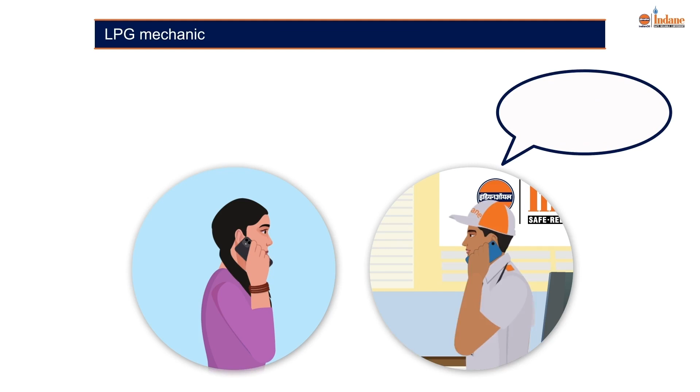A customer complaint highlights a problem with the product or service. These problems or complaints need to be investigated so that the services can be improved. Attempts should be made to resolve or address each complaint on time. It is the responsibility of every LPG mechanic to take feedback from the customer after the service.

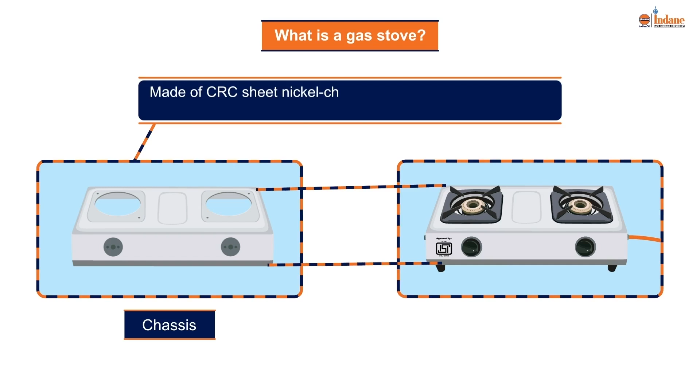To begin with, let's first understand a gas stove. A gas stove is an assembly of one or more burners forming a separate unit. It consists of a main chassis made of CRC sheet nickel chromium plated or painted, cast iron, vitreous enameled, or stainless steel sheets, etc.

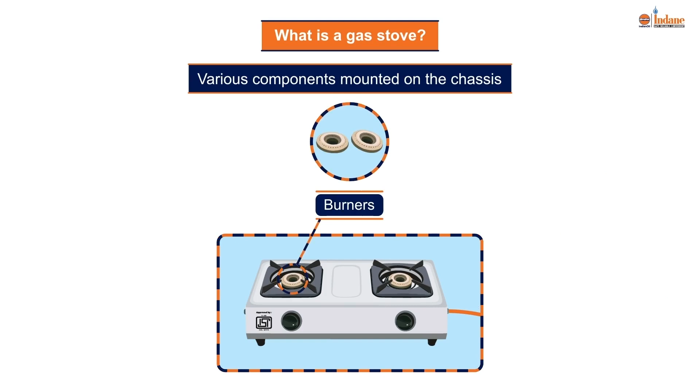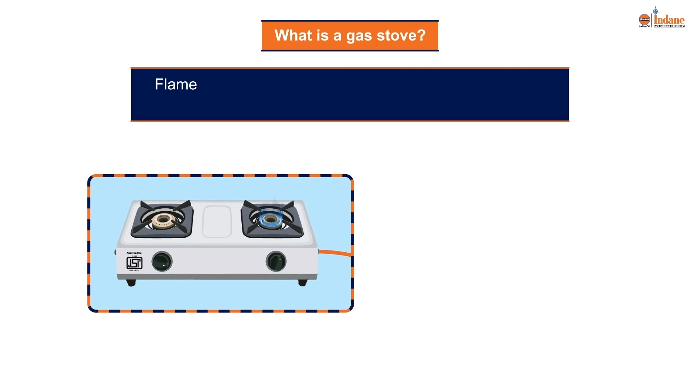Various components mounted on the chassis are burners, Suraksha hose, knobs, pan support, and legs. The flame or hot gases released from the gas burners can be regulated using the on or off knob installed on the gas stove.

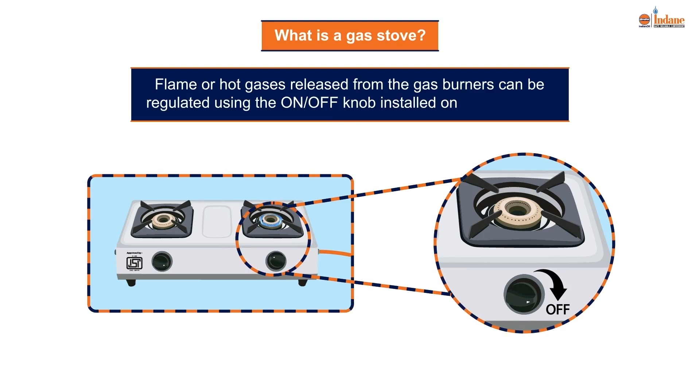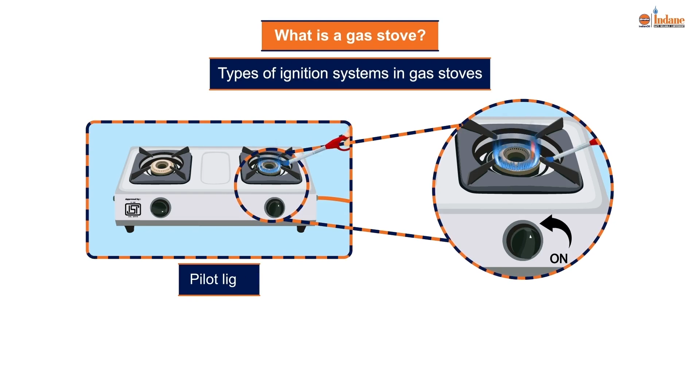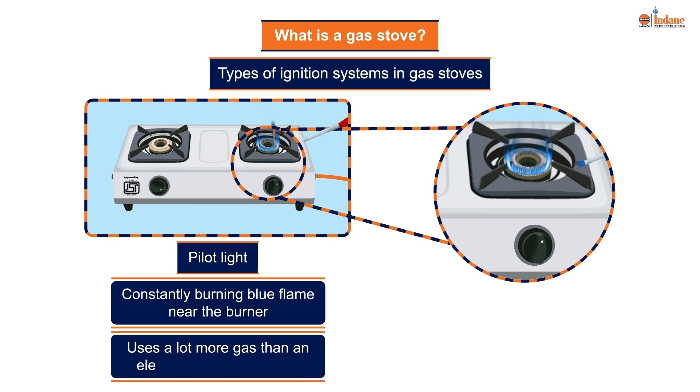Gas stoves contain one of two types of ignition systems: a pilot light and an electronic ignition system. A pilot light is a constantly burning blue flame near the burner. It uses a lot more gas than an electronic ignition system. An electronic ignition system creates a spark. You will hear this as a clicking noise only when you turn the burner on.

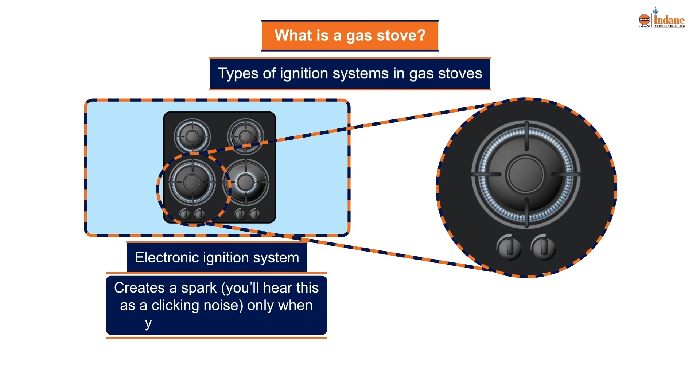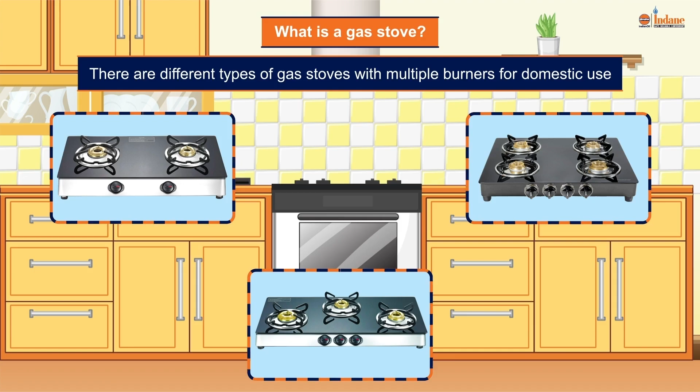There are different types of gas stoves with multiple burners for domestic use. With changing times, customers prefer modular kitchens with kitchen hobs in which the burners are fitted on the working platform of the kitchen, with operational knobs on top, side, or in front of the body. The principle of working remains the same.

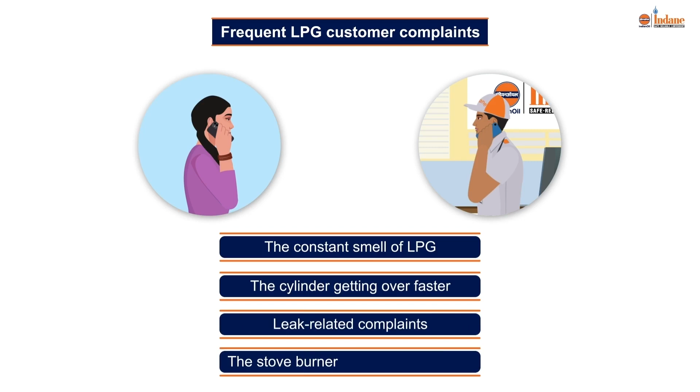Let's now look at some of the frequent complaints received from LPG customers and the ways in which the mechanic can respond to them: the constant smell of LPG, the cylinder getting over faster, leak-related complaints, and the stove burner not working properly. Let's now discuss the responses a mechanic should give for these complaints.

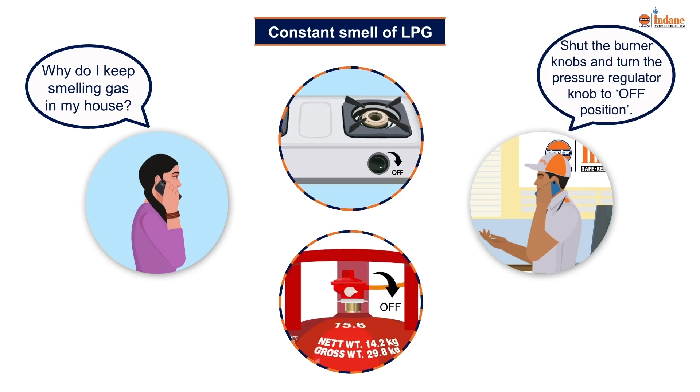When a mechanic receives a complaint about the constant smell of LPG, he should tell the customer to shut the burner knobs and turn the pressure regulator knob to off position. Open the door and windows for free ventilation. Extinguish all flames. Do not switch on or off any electrical equipment to avoid any electric spark or other sources of fire or ignition.

Light the burners only after the smell subsides completely. Check for the source of any possible leakage in the stove, regulator, burner, etc.

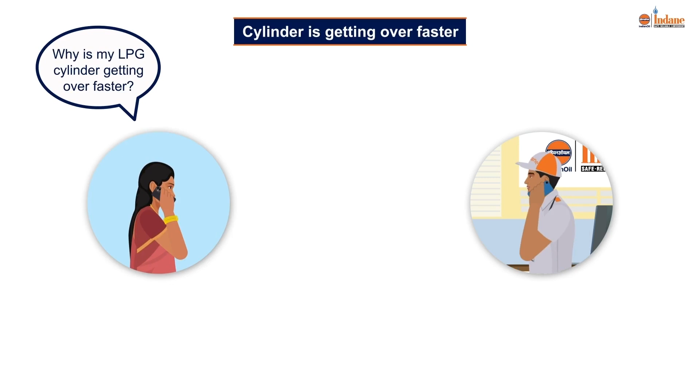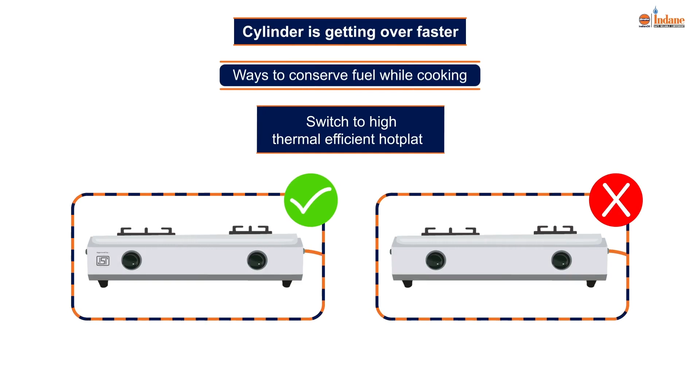If a complaint of cylinder getting over faster is received, understand that this depends on customer usage. Check the customer's monthly usage and consumption habits. Suggest ways for conservation of LPG. Educate them about conservation methods.

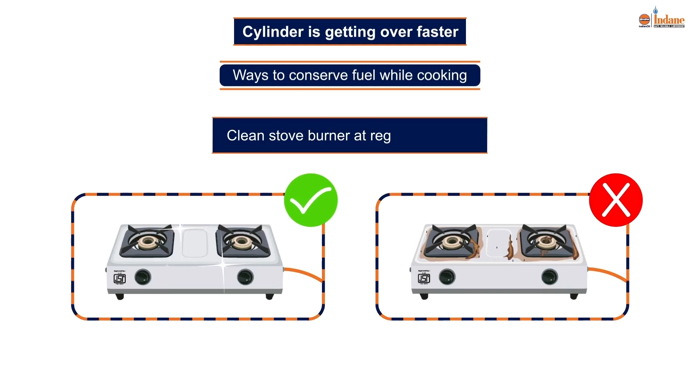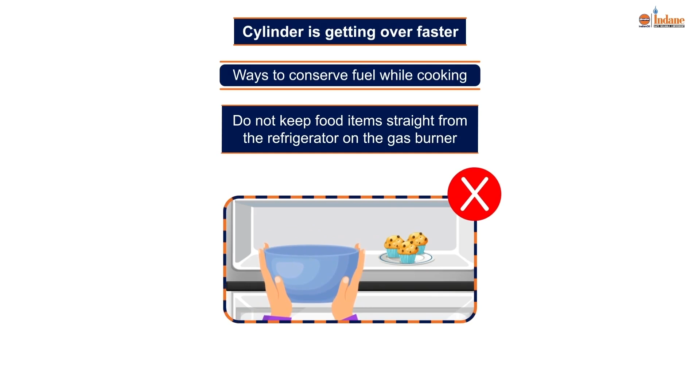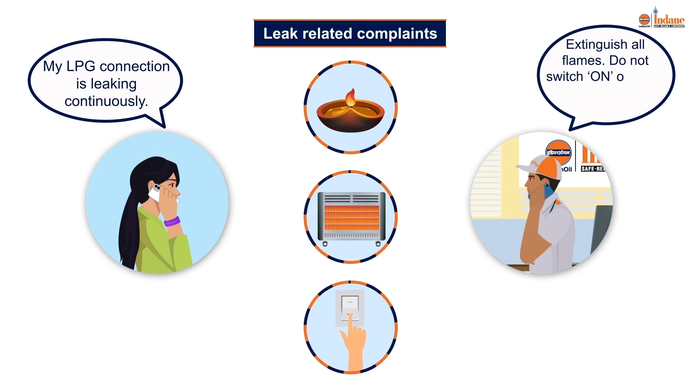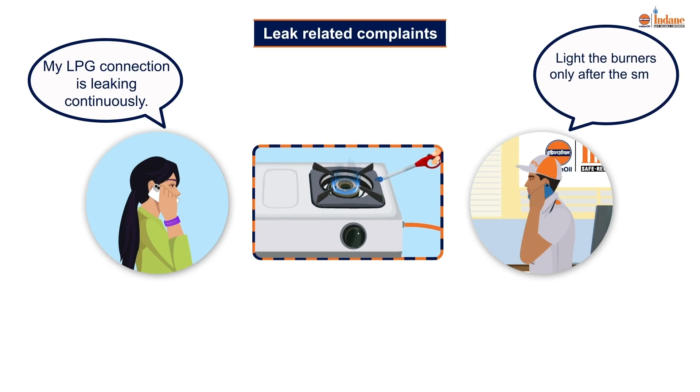If leak-related complaints are received, tell the customer to shut the burner knobs and turn the pressure regulator knob to off position. Open the door and windows for free ventilation. Extinguish all flames. Do not switch on or off any electrical equipment to avoid any electric spark or other sources of fire or ignition. Light the burners only after the smell subsides completely.

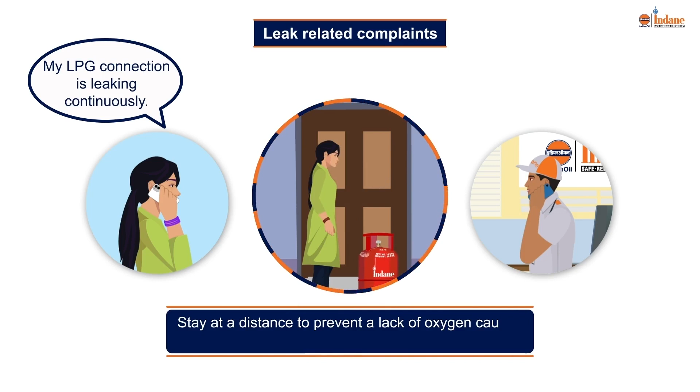In case of persistent or heavy leakage, detach the pressure regulator from the cylinder valve, fit the safety cap on the valve outlet, and remove the cylinder without tilting it to a balcony or open space. Stay at a distance to prevent a lack of oxygen caused by breathing air with a high concentration of gas.

When a stove burner not working complaint is received, tell the customer to check if the burners are switched off and allow the stove to cool down completely before cleaning. Check for any possible damages to the stove burner and replace if necessary. Clean the burner using a toothpick and light the burner to check the flame.

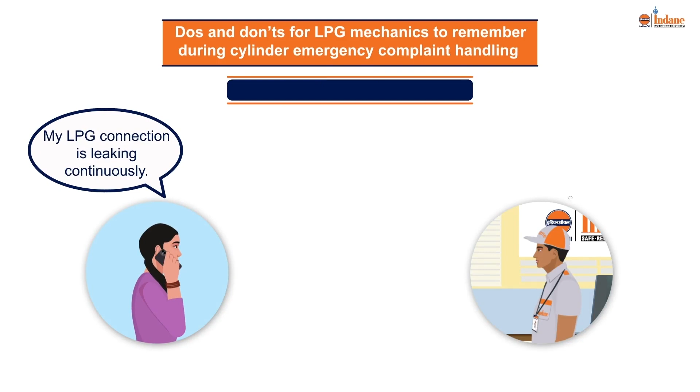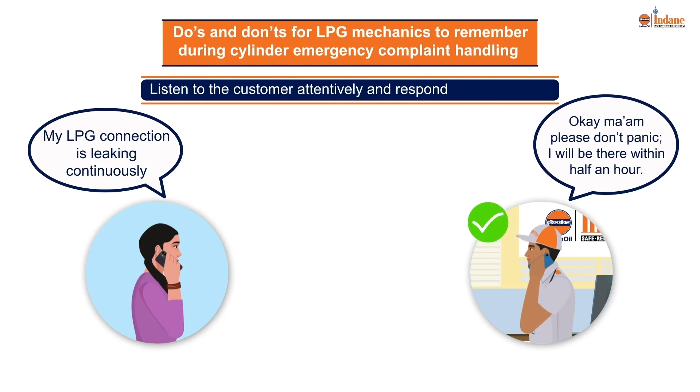Here are a few do's and don'ts for LPG mechanics to remember during cylinder emergency complaint handling. When a customer calls, receive the complaint and acknowledge it. Never delay after receiving the complaint call from the customer. Listen to the customer attentively and respond to them politely. Avoid interrupting the customer during the call or visit.

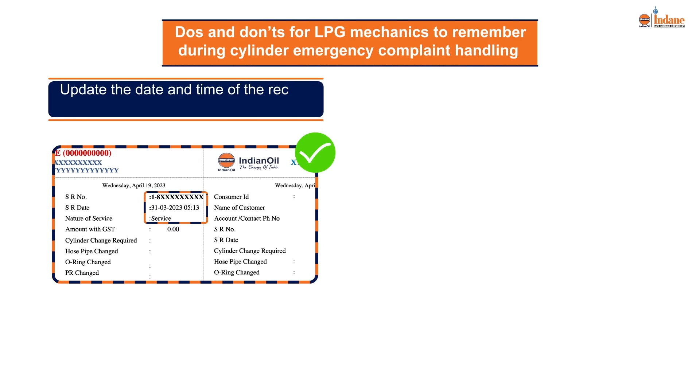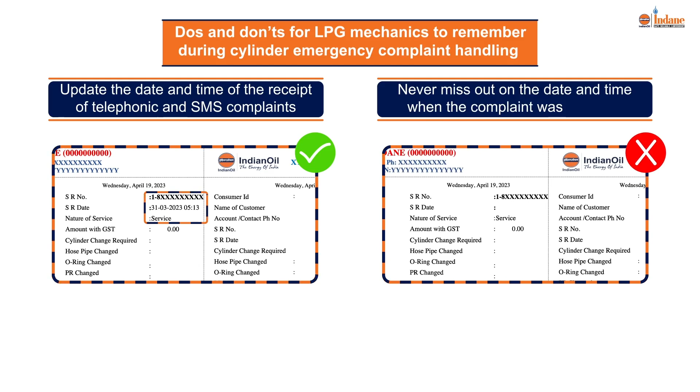Update the date and time of the receipt of telephonic and SMS complaints. Never miss out on the date and time when the complaint was received. Note down the details of the complaint and the customer's address and contact number. Never forget to note these details. It helps in keeping records of the frequency of complaints and the number of complaints received from the same customer, as this may need attention.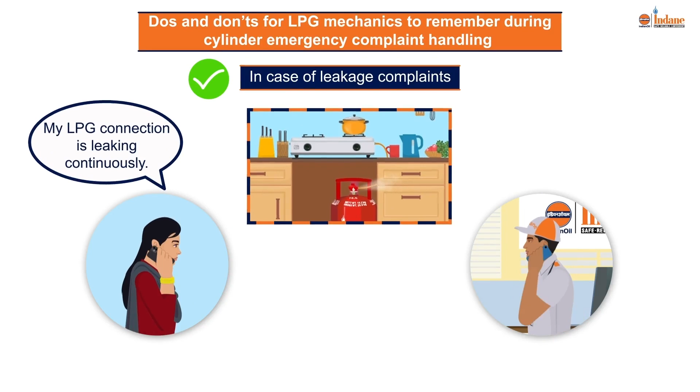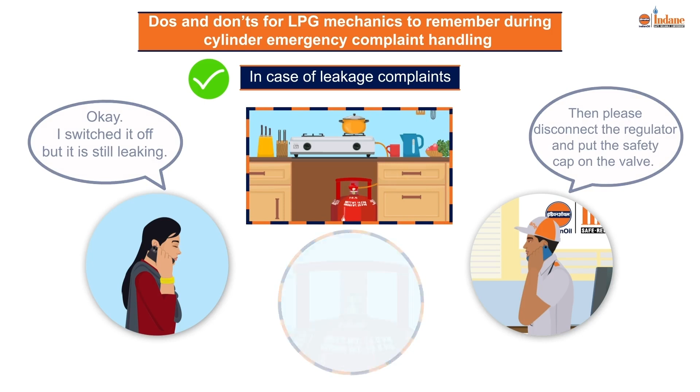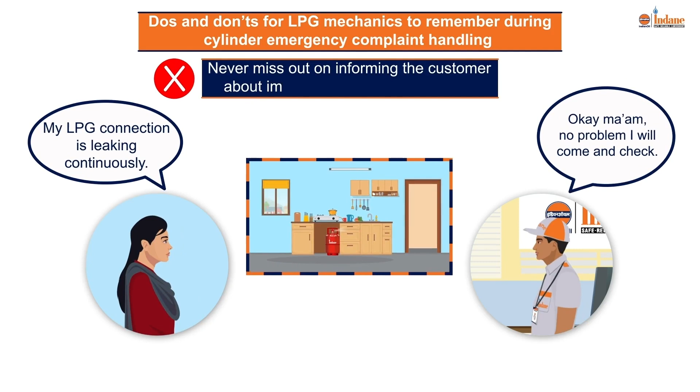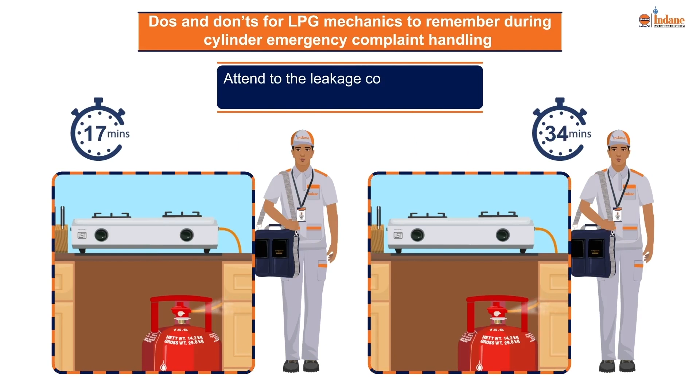In case of leakage complaints, instruct the customer to switch off the regulator. If the problem persists, ask the customer to disconnect the regulator and put the safety cap on the valve. Educate the customers not to switch on any electric buttons, light diya, etc. during a leakage. Never miss out on informing the customer about immediate precautionary steps during an emergency.

Attend to the leakage complaints within 30 minutes as it may be an emergency. Ensure the complaints on stoves or burners are attended to within 24 hours. After fixing the customer's problem, inform the customer about the ways they can report a complaint in future.

In case of leakage of LPG, they can call on 1906, a round-the-clock emergency helpline across India. Alternatively, they can register a complaint online with the service provider.

Always remember to carry the tools and equipment that the LPG mechanic should carry in his toolkit: O-ring, safety cap with nylon thread, portable fire extinguisher, leak detectors, O-ring inserter or remover, Suraksha hose, gas knob.

Fast customer service is the best protection during an emergency. Thank you.